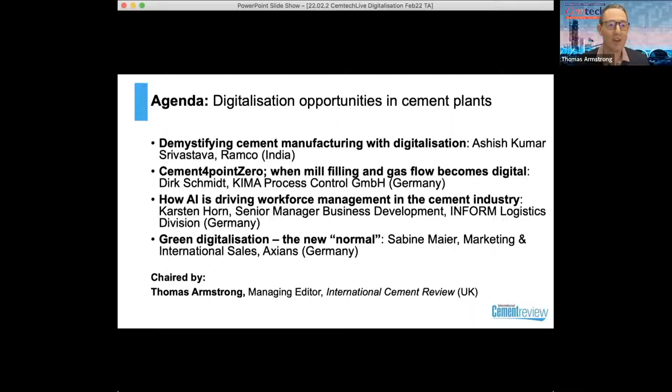But first off, and conveniently, we're going to take a look at the subject of demystifying cement manufacturing with digitalization. This is with Ashish Kumar from Ramco. It's a pleasure to welcome you here, Ashish. I'm going to allow you to share your slides while I make your introduction.

Ashish is a cement industry veteran with 30 years experience in plant operations, plant management, and safety management. He's presently working with Ramco Cements Limited as Senior Vice President at the Alathiyur plant in India, which includes 3.05 million tons per annum of integrated cement plant capacity and a grinding unit with 1.6 million tons capacity. Prior to this, he has a rich experience across various cement companies globally, including Dangote Cement in Ethiopia, ARM Cement in Kenya, and ACC Cement in India. He has an in-depth experience in leading groups to achieve goals in health and safety and achieving ambitious targets. And it's great to have someone here who's going to be able to talk to us from the perspective of a cement producer, as well as a solutions provider, which is what Ramco is.

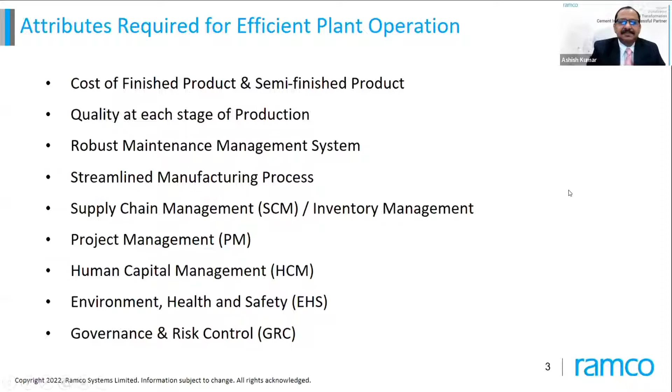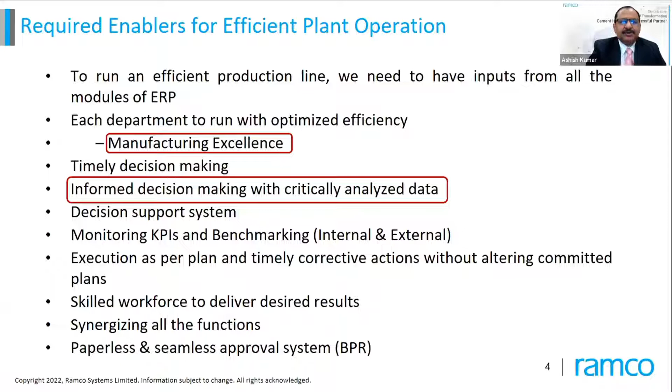So when I say informed decision making with critically analyzed data, I mean something which I will explain in the next slides to come, and also I will explain manufacturing excellence.

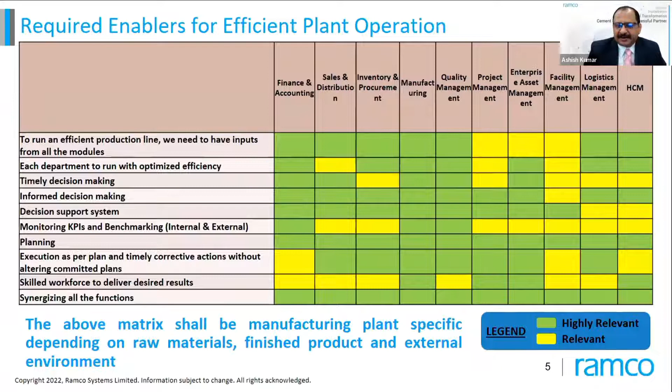But coming back to my point, informed decision making with critically analyzed data - every morning at 8:40, all our data inputs are over, and at 9 o'clock all my HODs are having feedback from the ERP system via SMS, email, and login, whatever way they can, to see what went well and what did not go so well. So this data is ready at 9 o'clock, and at 9:30 when we meet for production planning, we have all the critically analyzed inputs, which I will explain in some next slides.

So first question is, why do we need a powerful ERP? The answer is there is intense competition - competition from the market which desires the best quality product at the lowest cost. Now how to achieve it? In cement manufacturing, around 60% to 70% of the cost is energy, whether thermal or electrical. So how well we utilize energy at the cheapest and lowest consumption level determines who will be the winner in the marketplace. Then comes manufacturing excellence.

Manufacturing excellence is required because every management continuously raises the bar of performance, so we have to perform best once and forever. Now I will explain what I mean by excellence. Excellence is a talent or quality which is unusually good, or surpasses ordinary standards. When linked to manufacturing, excellence is the sustainable and continuous improvement of operations to reduce wastage, increase profits, and gain the winning edge over competition. It is an ongoing and never-ending process to improve our business. In a nutshell, having achieved top performance once and repeating it again and again, or surpassing it, is manufacturing excellence - and our ERP package supports achieving manufacturing excellence.

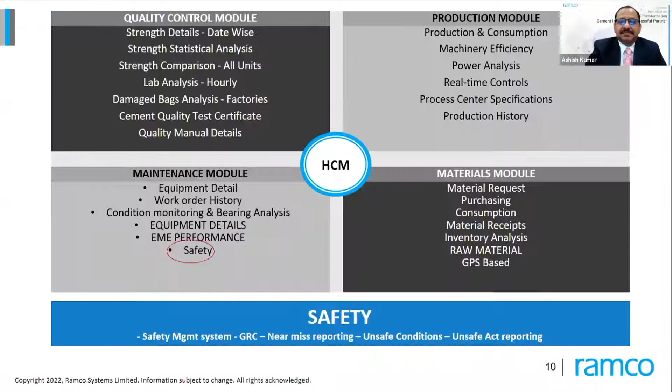So here, when I was saying informed decision making, at the 9:30 meeting when we meet, we have the cost details of all sections of the plant with analyzed data showing where things went well and where things did not go so well. This data helps us drill down and find out whether we were meeting the target of manufacturing excellence or not. Today's data can be compared with previous week, month, or financial year data, which we call internal benchmarking, within the plant. But it can also be compared with other plants, which we call external benchmarking.

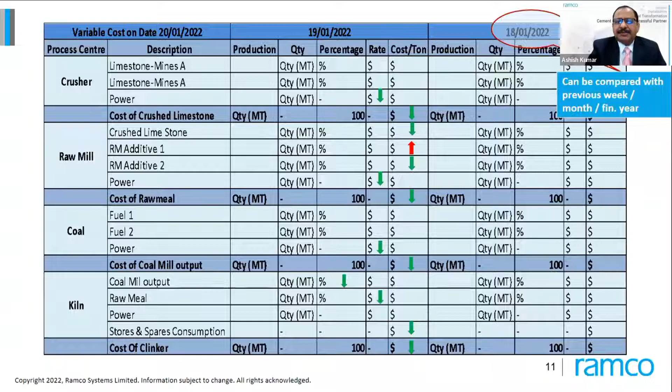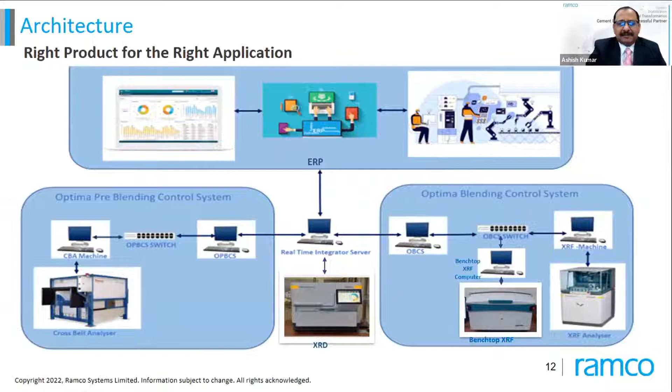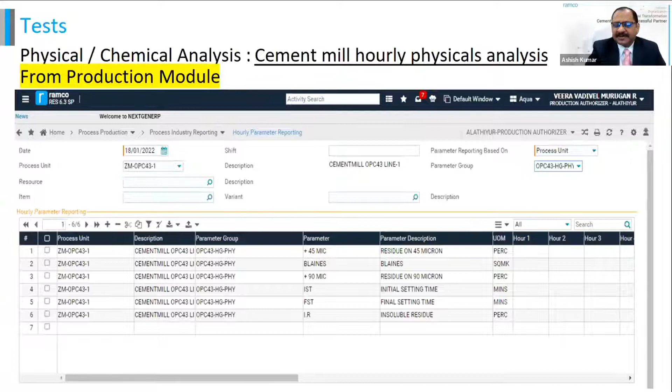This is the form for capturing the quality of the cement mill hourly data. You can see all the data analyzed by the machines, XRF, XRD, or whatever, goes into the system and is used for comparative analysis purposes, such as residue on 45 micron or 90 micron, IST, FST, or insoluble residue. Now I would explain Industry 4.0.

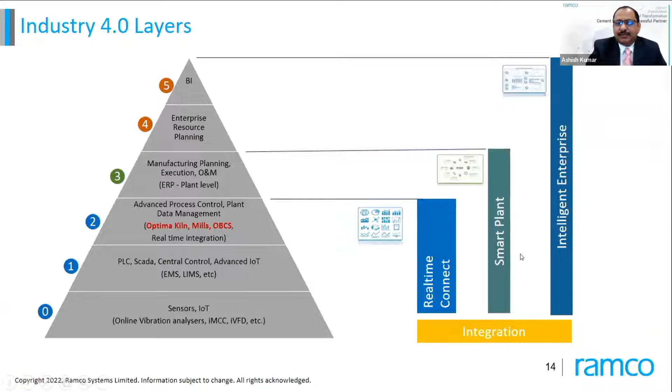The data goes to ERP at the plant level, and from there to ERP at the corporate level, and finally the data is used for business intelligence. So how does it work? Decision making at this level uses the support of artificial intelligence for process control, so we call our plant a smart plant. Here the processes are controlled with the help of advanced process control, and subsequently the final integration gives us data useful for an intelligent enterprise.

So what are the benefits of using advanced process control for kilns and mills? These are: minimum operator intervention, stable operation, consistency in cement and clinker quality, optimization of operations thereby increasing productivity, and reduction in specific power consumption mainly for fans and motors.

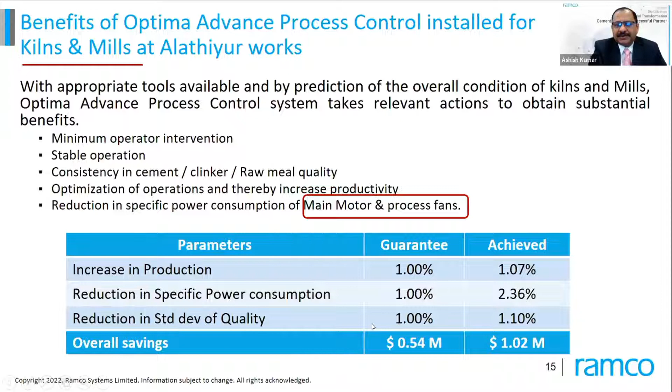So you can see the benefits achieved using these parameters: increase in production, reduction in specific power consumption, and reduction in standard deviation of quality. You can see our system, whatever we guarantee, we achieve more than that on an annual basis.

Now, how does this advanced process control work? Here I am showing you the architecture of the model predictive control system, which is enhancing our operations. In a normal plant, we have the plant and sensors, and all this data goes to PLC and SCADA, and from there it goes to the OPC server, and from the OPC server it goes to the client.

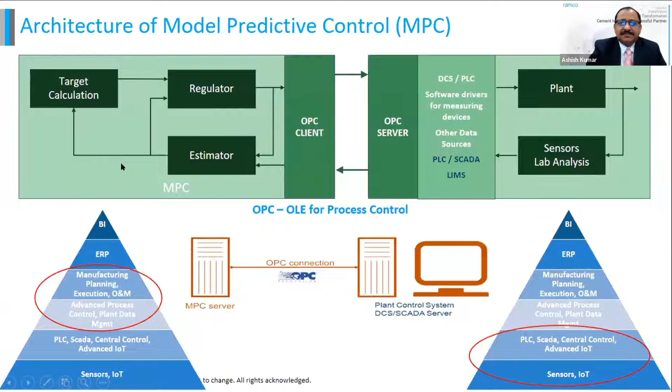The artificial intelligence for process decision making works with the help of an estimator and regulator. You can see in this pyramid, this side is the bottom two layers of digitalization, and here we have the top two layers. So how does this data work with the estimator and regulator in MPC? The estimator uses historical measurements and a model to compute the most likely historical process trajectory and define future process parameters or anticipated results.

You can see here the past data is studied, and based on that it is derived how these process parameters will behave in future. Or you can see it in this side of the slide, where in a normal plant operation a CCR operator always operates within safe limits. Then we have targets. When we don't have an advanced process control system, there will be more variations, so to ensure the variation doesn't cross the limit, the operator tends to operate at a lower level. But with APC, which reduces variations, the variations are very minimal, helping bridge the gap between the limit and target values through reduced variations.

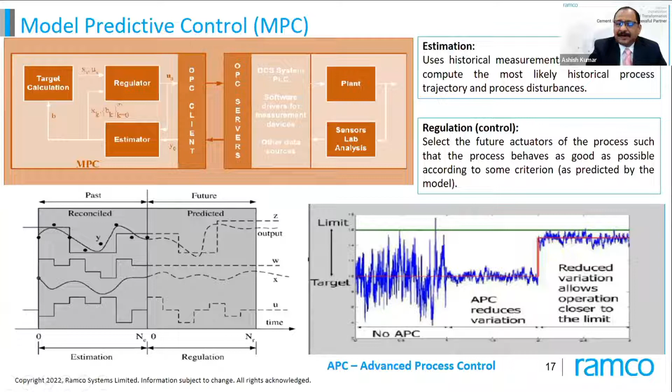We have an energy management system, and here the data flows from the EMS system to the ERP system flawlessly, machine to machine. We have 22 zones in ring topology. You can see all these various sections of the plant, all interconnected in ring topology using 13 kilometers of fiber optic cable.

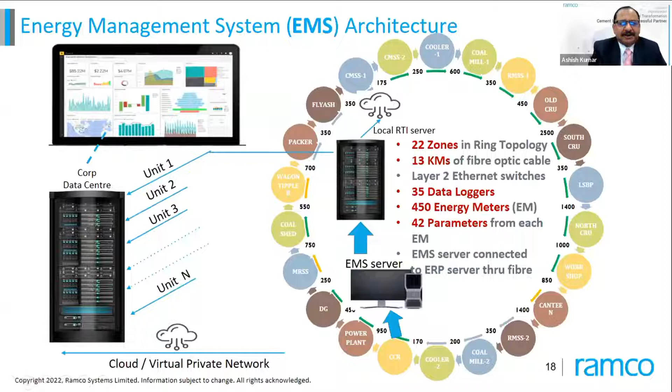There are 35 data loggers and 450 energy meters. The data from CCR flows to the EMS server, and from EMS server it goes to the local real-time integrator server. Then using cloud or VPN, it goes to the corporate unit. We have 10 units, so the data from all 10 units goes to the corporate server.

This data is used for benchmarking purposes. So how it works: as I said, there are 22 zones.

This is zone number 2. There are 31 energy meters in zone number 2, and all the data flows to a data logger, and from there it goes to an Ethernet switch. This Ethernet switch of zone 2 is connected to zone 1 and also to zone 3, and subsequently 3 is connected to 4 and so on up to 22. All these Ethernet switches are connected in a ring system.

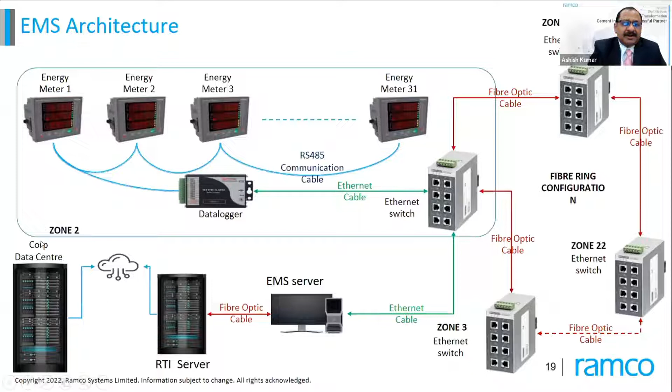From this server, the data goes to the EMS server, then to the RTI server, and finally to the corporate data center. With this database, using ERP, we get a very classified report of how much power consumption was done.

Now I will talk about paperless approvals. A lot of management time is wasted while we do approvals on a physical basis, so we have an e-approval system where the documents flow in the software.

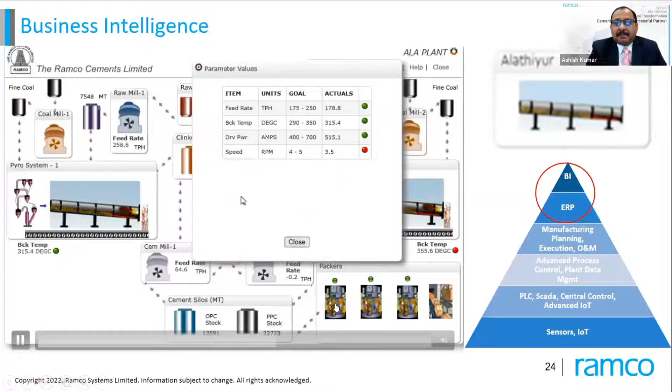Now I would talk about business intelligence. In the business intelligence system, you can see there is a page that covers the entire plant. You can see here that all these sections are running except cement mill 2. The full plant is running, both kilns are running, packers are running, and I can see the main process parameters.

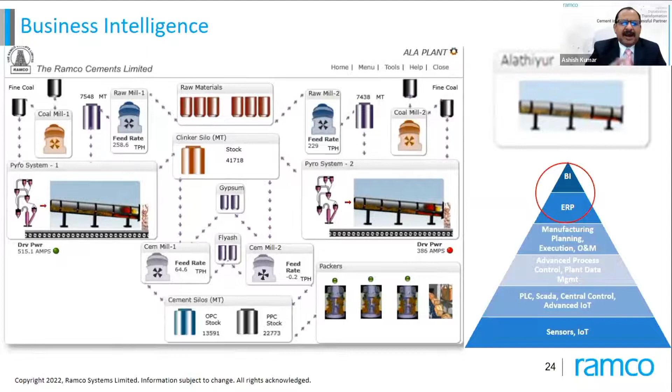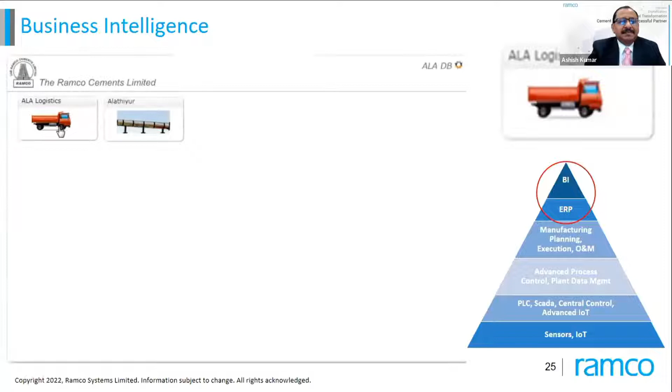When it goes to the corporate level, there are 10 plants connected, so 10 plants' data pages are there at the corporate level. This data can be used for business intelligence purposes. The same thing can be applied to logistics, and this is an example of business intelligence which we use for logistics.

I can see how many trucks have reported for taking out the cement, what are the varieties and capacity of the trucks, and how many trucks have been loaded in how much time. For example, in 0 to 1 hour we have loaded 3 trucks, and in 1 to 3 hours, 1 truck has taken more time. So this data is going for further analysis.

Same way for our raw materials also, we keep a check on how many trucks have entered the system, how many have gone out, what was the average unloading time, and what was the waiting time. All this data is used for negotiating and getting financial advantage while negotiating with the transporter or with the suppliers.

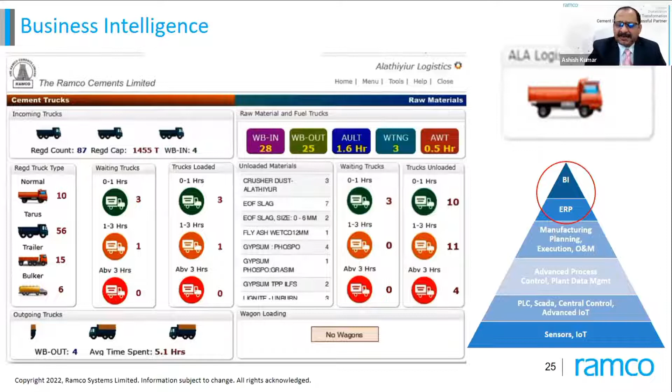As I had told, our company works on the principle of right product for right application. So we have smart sensors for foolproof systems right from quarry to the dispatch lorry. There are 12 different types of cement in our plant, so we have to ensure that each lorry should have the correct product, correct product quality and quantity.

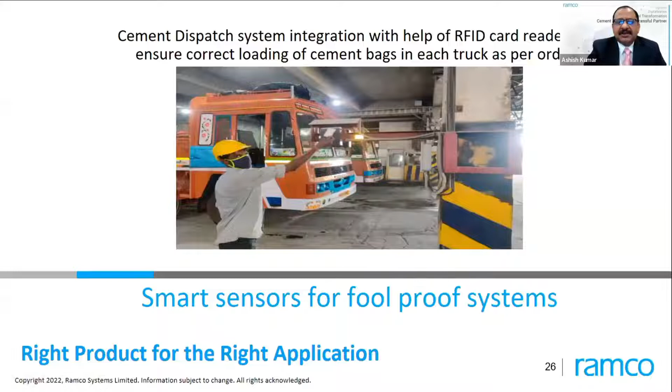This is ensured with the help of an RFID card. This card has all the details of what is required, and if it does not match, then the truck cannot move out. So our system is so perfect that with the help of the RFID card, we ensure that the correct product goes to the customer. Now, how can we use this digital information for digital transformation purpose?

So up till now, I had explained with respect to the smart plant. Now, for business intelligence, the same modeling can be used for market prediction, theory of constraints modeling, or market related decisions which drive capacity expansion or new markets.

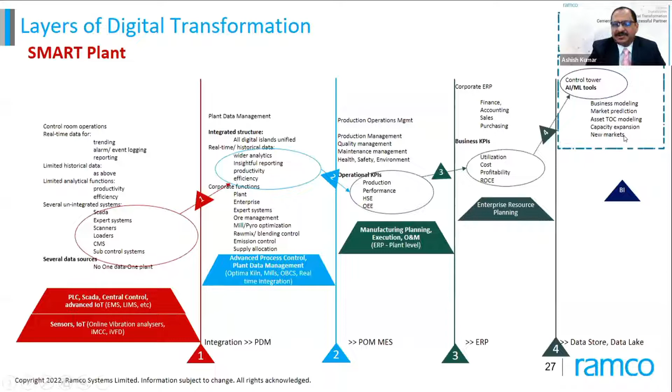As I said, our human capital management is completely interlinked with all the modules of ERP. So at Ramco, we are simplifying HR strategy by automating traditional HR transactions and driving business benefits. We believe all our employees have latent potential within them, and it is management's responsibility to convert this latent potential to talent.

So how do we achieve this? In a normal base level HR module of any ERP, you can get things like facial recognition based attendance, historical pay slips, leave management. All those things are at a normal level of human capital management.

But we have the advanced HCM module where our performance management system, skill upgradation, training need assessment, training calendar preparation, and training effectiveness evaluation, everything is integrated in our ERP. What is the net benefit of this? I'm very happy to inform you that our employee turnover ratio is less than 1%, because we get all the smart intelligence about training people and improving and sharpening their skills.

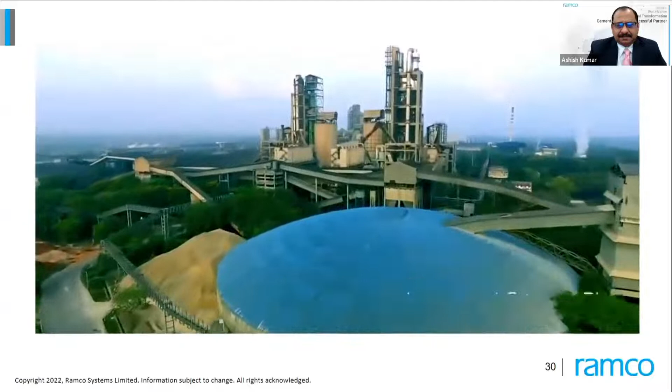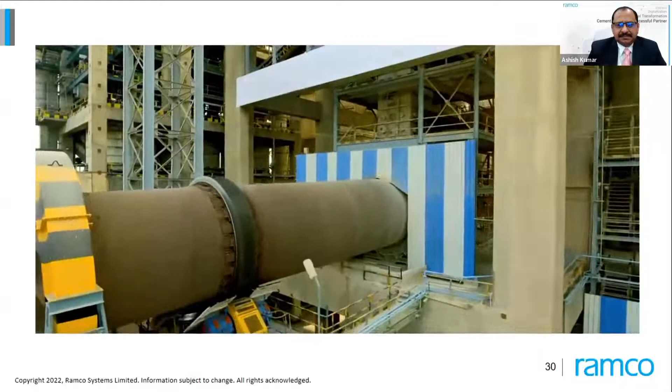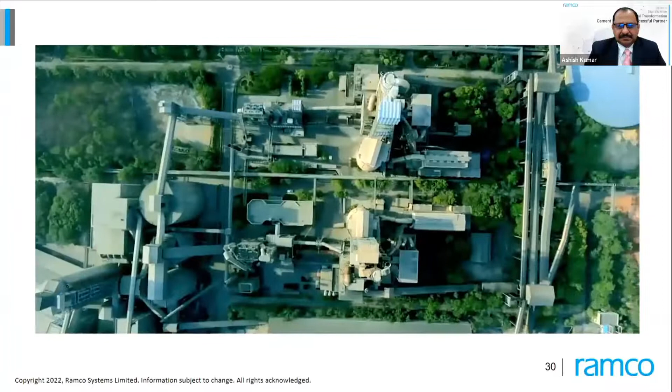This is one of the features of our plant. With the help of ERP and perfect business intelligence, we have been able to achieve various awards and accolades, like we have got the 4 Leaves Award from the Center for Science and Environment. We are the only cement manufacturing company in India which has bagged this award.

We have also got the Green Belt Development Award. We had planted 130,000 trees in the year 2020.

And because of the support of our ERP, we have bagged awards on human resource, raw material, energy, environment, and production from the International Research Institute of Management. In India, the Confederation of Indian Industry is the most recognized and respected industrial body, and they have awarded us 18 times Excellent Energy Efficient Unit Award, and for the last 3 consecutive years we have got the National Energy Leader Award.

So this is the power of ERP, which we can utilize to the full extent with the support of digitalization and timely inputs to the relevant persons. Thanks a lot.